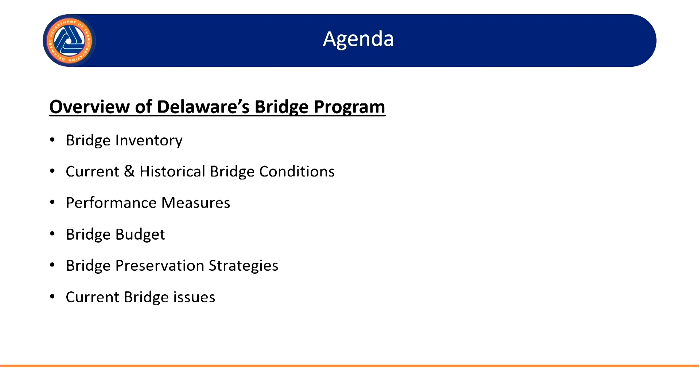So I'm going to talk a little bit about our bridge inventory, then our current and past bridge conditions, a bit about our performance measures, a quick slide or two on our bridge budget, our bridge preservation studies and strategies incorporated over the past 12 to 15 years, and then some current bridge issues we're having.

So that's not a typo. We only have 1,782 bridges. About 45% of those are NBI length, and the remainder are what we call state bridges, or non-NBI length. The deck areas are 8.4 million square feet for NBI bridges and just barely 500,000 square feet for our non-NBI bridges. We have 24 fracture critical bridges.

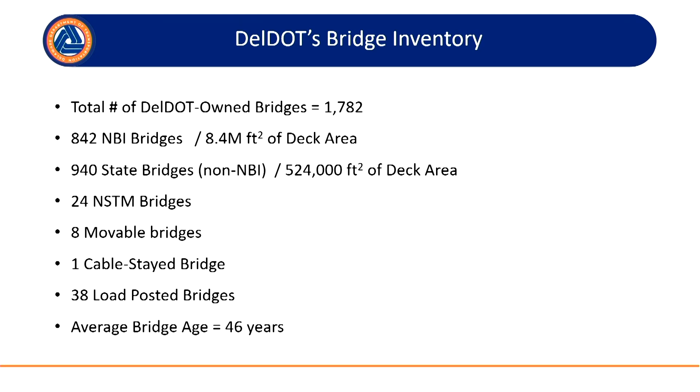We have 8 movable bridges, 1 cable-stayed bridge down at our Indian River Inlet, the beach area. If anybody can be here around the weekend, if you get a chance to get down there and see it, it's a real neat bridge. There's a nice restaurant there, and the beach itself is nice.

We have 38 load-posted bridges, and our average bridge age is 46 years. Just a quick snapshot, you can see we have a lot of culverts — more than half of our inventory is culverts, and of course a lot of that's our non-NBI bridges. We have almost 600 beam bridges, a little over 100 or so slab bridges, and then miscellaneous other bridges.

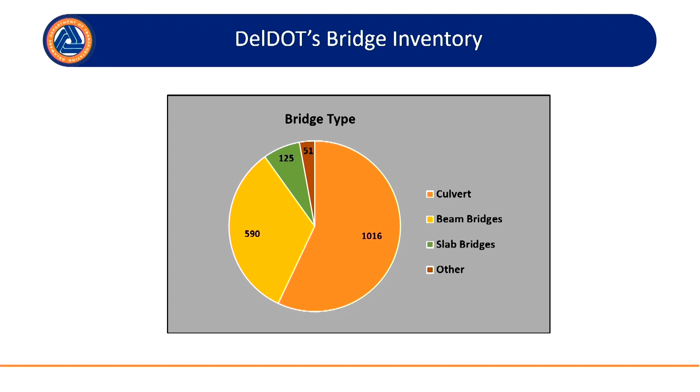So this is from our 2022 finalized data that we submitted to the feds. We're currently at just about 85% good for our bridges, and just about 1.5% in poor condition. This gives the breakdown between NBI versus state bridges.

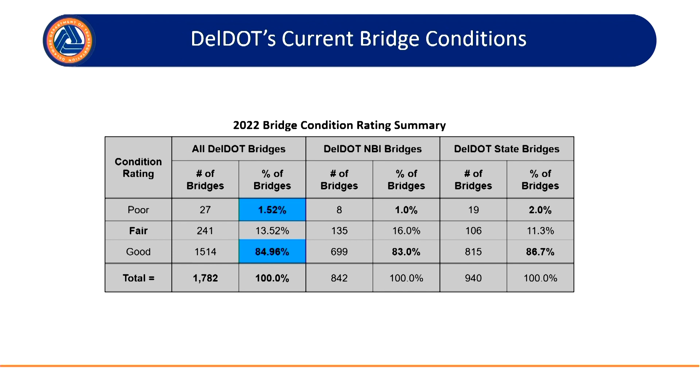Historically, for the past 12 years, as Jason mentioned, in 2011 we were at almost 73% good, and now we're at 85% good. You can see the trend going up. Likewise down at the bottom, the poor condition bridges were almost at 7.5% back in 2011, and now we're down to 1.5%.

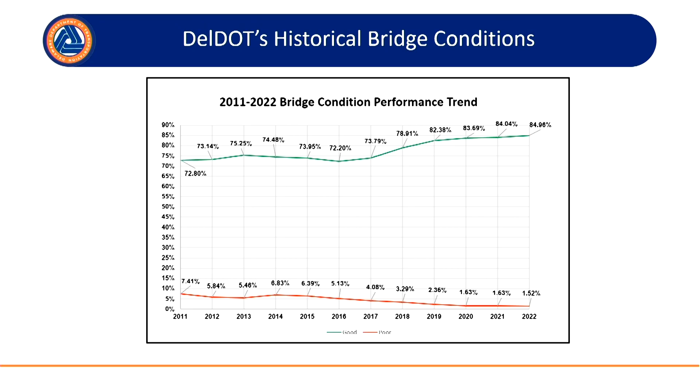A lot of reasons for this — we started throwing a lot more money at our bridges, a lot more work on the preservation and preventive maintenance side of things, and incorporated some different strategies to address our bridge conditions. As Jason also mentioned, combining bridge management with bridge design and creating a whole separate structures unit really helped out.

So, performance measures. Delaware is stubborn — when the feds changed the definition of fair condition back in 2016, I think it was, we still look at fair condition as NBI 5. So when I say good, that means NBI 6 through 9. Poor condition is obviously still the same. Our current performance goals for our bridges are to have more than 75% in good condition and less than 3% in poor condition.

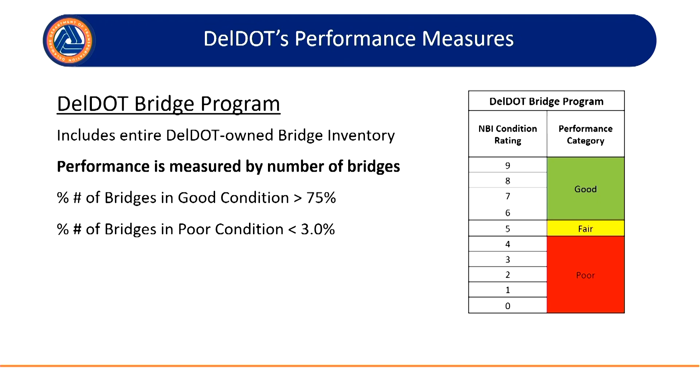So we're in an AASHTO BrM state for both our bridge inventory and our deterioration modeling forecasting program. I developed that probably back in 2019 through 2021 with the help of a couple others from our section.

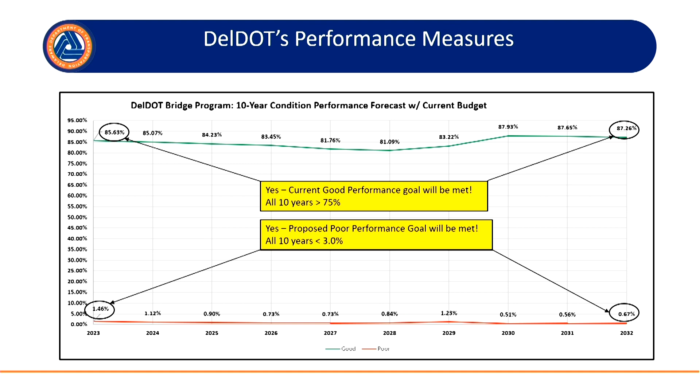This is a slide from our meeting with senior leadership earlier this year — it's the 10-year forecast for our bridges. You can see, about 85% there for 2023, and it looks like around 87% ten years out, so we're well above that 75% performance goal I showed earlier. Likewise for poor condition, by the end of the 10 years we should be around 0.5% in poor condition. So we're looking really good.

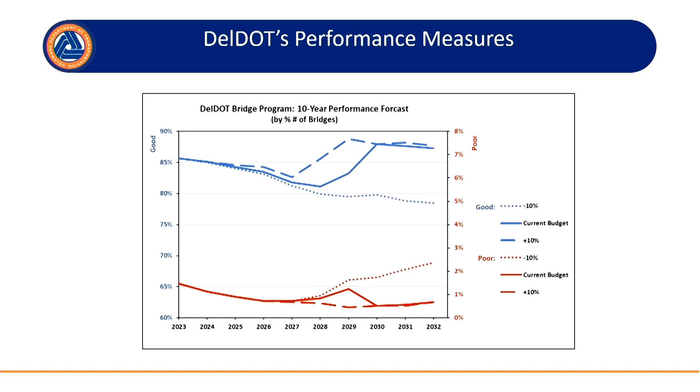So this is our bridge budget. This is strictly just bridge work, whether it's replacement, rehabs, or preventative maintenance. It doesn't include inspections or any other kind of structures. It's essentially on average $73 million per year for the next 10 years that we're planning on.

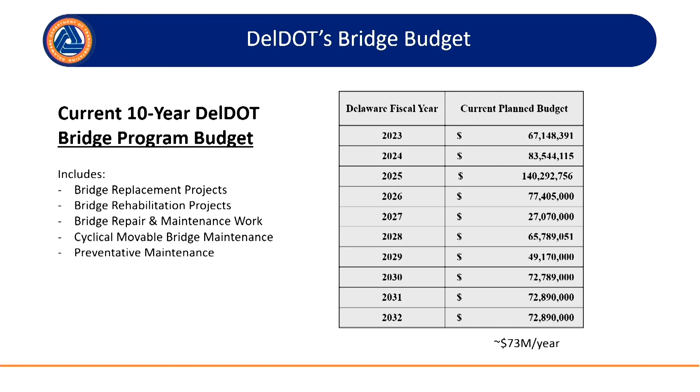During the orientation lunch earlier, I think it was Allison from Massachusetts who said that with the additional federal money and some state legislature approval money, they got like $3 billion that they're going to be spending in the next few years. I could work here for 30 years and we're never even going to spend $3 billion. So it shows you how small our program is.

Some preservation strategies - a lot of these are no different than what your state does. We have a concrete deck sealing program. We use penetrating sealers such as silane, but we'll also use methacrylate for actual hand sealing cracks in the deck. If there's a lot of cracks, we might flood seal the deck.

We started this in late 2018. To date, we have done about roughly 170 bridges. We have roughly 520 bridges with concrete decks. And our goal with this program is that we reseal the deck every 5 years.

We also have a bridge painting program for our steel bridges. While we're out there, we'll also paint concrete rails and concrete substructure units. We have 361 bridges that are steel supers. Assuming a 30 to 32 year paint life, that's roughly 10 to 12 bridges per year.

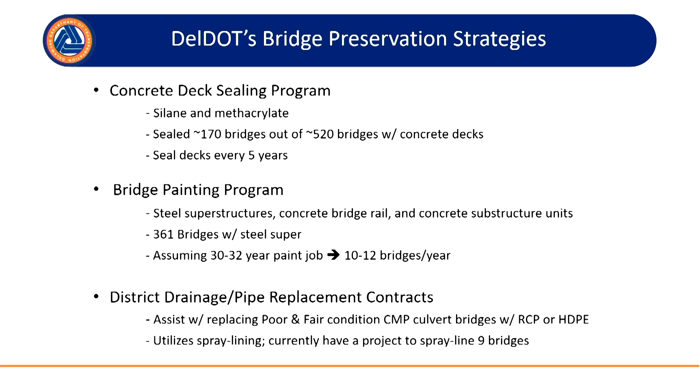We're not really doing that right now - we're probably more in the 7 to 10 range. So we're going to have to step it up over the next 5 to 10 years. We have our interstate coming due within the next 5 to 10 years, with a lot of bridges and a lot of steel beams.

We have 4 maintenance districts in Delaware, and each district has their own district open-end drainage contract. These originally just started out for replacing things like crossroad pipes, not really bridges. But about 2 years ago, we started using those to help replace some of our corrugated metal pipe bridges. Our Canal District is actually going to be using that open-end contract to either spray line or slip line 9 bridges that we have. So they've been helpful to attack our CMP bridge inventory.

We also have a pile jacketing program. These are typically used on steel monotube pile bridges that we have. We have very few bridges with H piles. We have 75 bridges that have monotube steel piles.

To date, we have addressed or pile jacketed 42 of those bridges. We currently have about 22 bridges in the works or planned for the next 2 to 3 years. At that point, we'll have about 85% of the bridges pile jacketed, and the rest we plan to have done within the next 10 years.

Typically it's steel piles - we have done some concrete piles that were showing significant deterioration. But most of our concrete pile bridges are pre-stressed piles and are still relatively new, only 30 to 35 years old, and they're just not showing the deterioration yet. But it's something that in the future we might have to start looking at pile jacketing as well.

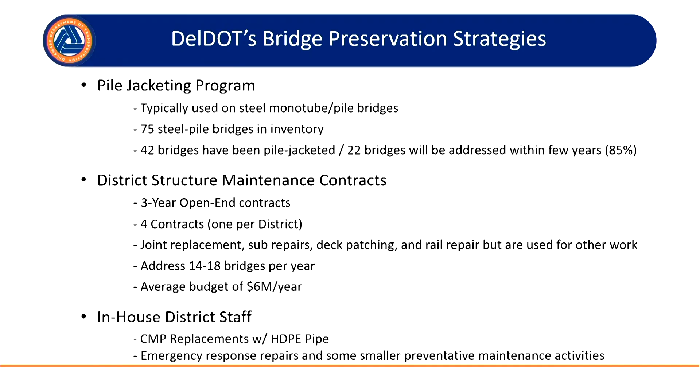Our districts also respond to emergency events, like a joint popping up in the road, or a big storm event. And they do some smaller preventative maintenance stuff like cleaning decks, cleaning out catch basins, drainage on decks, sweeping the bridge decks, resealing poor joints like along your wing walls or back wall, and some other things. But we're fairly limited.

For our interstate system, we have an open-end deck patching contract. This strictly addresses rideability, joints, deck patching needs, and approach slab issues. We spend about $800,000 on that a year. We're actually working on it — a lot of those joints on 495 and a northern portion of 95 are coming due.

There's a few bridges that need some overlays, and there's quite a bit of deck patching. So we're putting a standalone contract together to address that separately using federal funds, all at once in two different phases. We're going to do 95 north and then 495 next. A lot of these bridges are from the 60s and 70s era.

For our movable bridges, as I mentioned earlier, we have 8 movable bridges. We have 3-year open-end contracts to maintain those, do the cyclical routine maintenance, and assist when the bridges malfunction — unfortunately that happens from time to time — and also complete necessary mechanical and electrical repairs. That's roughly a little less than $5 million per year for all 8 bridges.

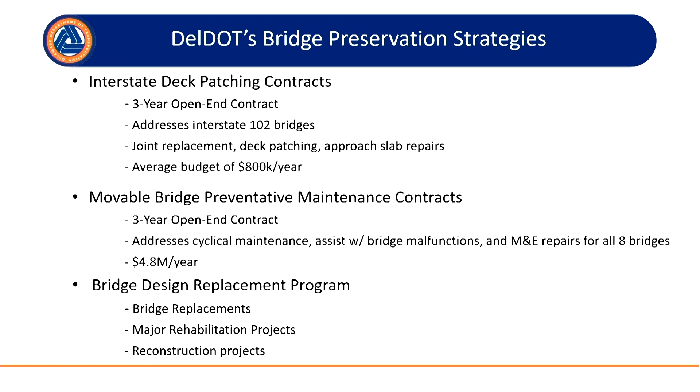Last, just the bridge design replacement program. I guess it's not just replacements, but this would be any major bridge replacement, rehabilitation, or reconstruction, such as a superstructure replacement or even a deck replacement.

So some current bridge issues that I want to discuss. What you see here is no different than any other state — typical deterioration, things we have to do to maintain our inventory. I'm not really going to talk about these.

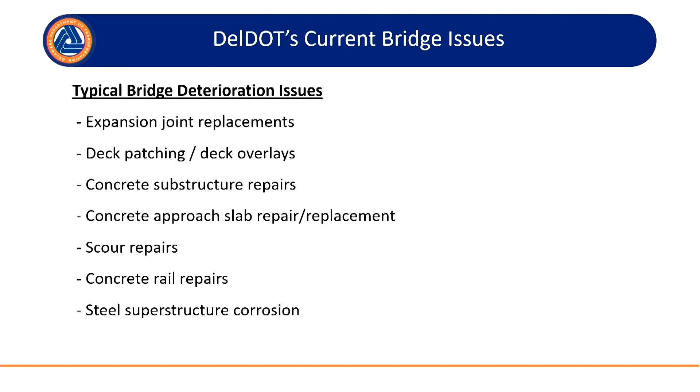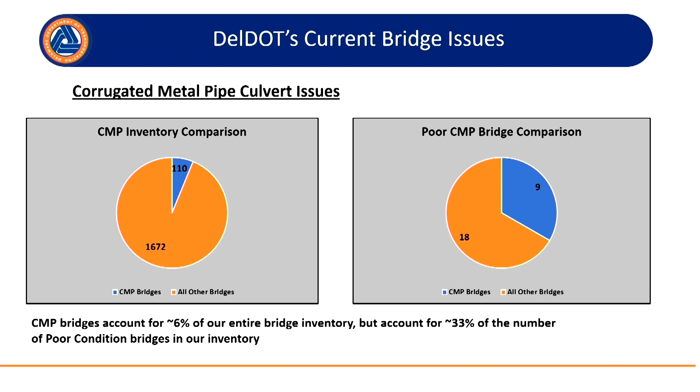The first one is our corrugated metal pipe inventory. It's something we've been dealing with since probably 2006. We're past the bubble and towards the tail end. This chart on the left shows the number of our corrugated metal pipe bridges, which is 110, and then all other bridges. So our corrugated metal pipe inventory accounts for 6% of our total inventory. But if you look at the chart on the right, we have 9 poor condition bridges that are CMP bridges — they account for 33% of our poor bridge inventory. So those 9 bridges are currently in the works to be replaced. Some of them were priority replaced this year, the rest will be replaced either later this year or first thing next year. Corrugated metal pipes have been a big thorn in our side for the past 15 plus years.

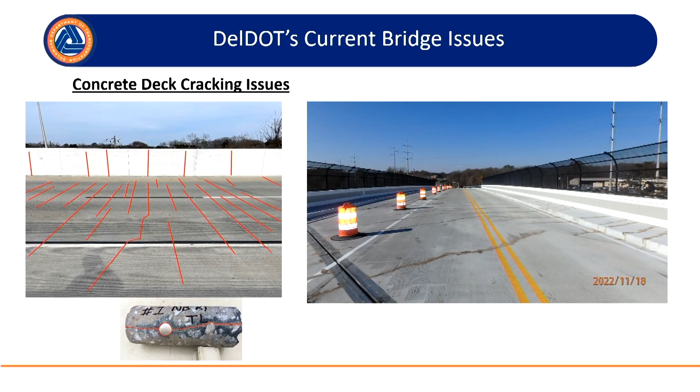Kevin Linda, who will be presenting next — he's not presenting on this topic, but he's actually the one from our department in charge of heading the research to look into this issue more and figure out what's going on. There's a number of factors, as you can imagine: your deck concrete mix, construction practices, temperature — everything. There's a lot that goes into this.

So the next issue is fill loss that we get behind a lot of our sheet pile bridges. It doesn't affect the bridge — no jeopardy for the condition or safety of the bridge itself. But a lot of times the steel sheeting either has lifting holes that were never filled, or when they drove the sheet piles, they split at some point. You get a little bit of scour, and it exposes that split. Or if it's timber, the timber rots. Basically, we get fill loss from behind that sheet pile, and the road behind it settles.

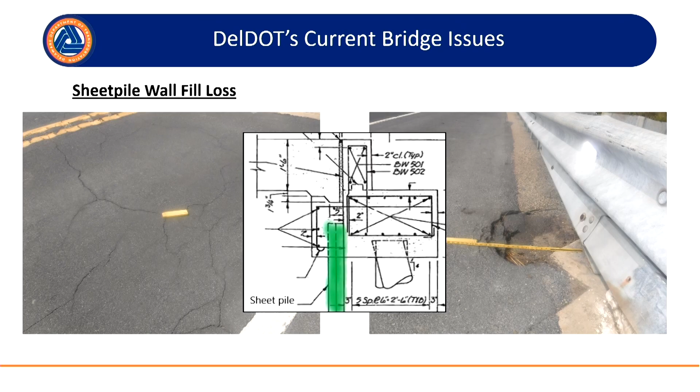We probably get maybe 2 of these a year that we find. We actually did a presentation on this. John Moore from our department, who will be presenting later today on paint, and Steve Richter did a presentation when we were in Burlington back in 2019 on this. But we still see it surface, and it's not a bridge issue necessarily in the sense that there's no safety concern or deterioration of the bridge, but it's something we've got to address.

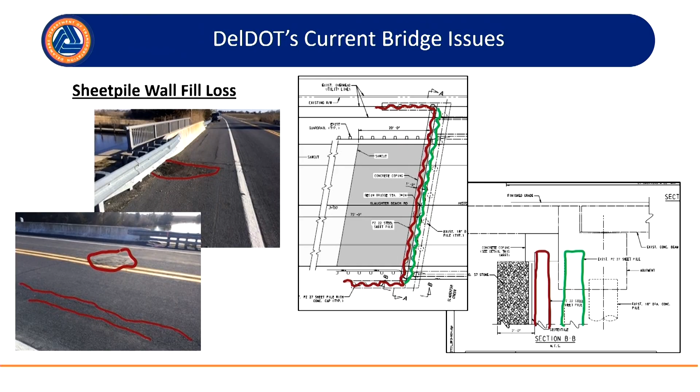So when we find this, typically what we do is drive sheeting behind the existing structure. In the center picture, you see the red marking - that's the new sheeting that we drive behind the existing one. And in the picture on the right, we'll actually put a cap on that concrete cap and tie it into the backside of the abutment. That way no more fill can be lost. Of course, we're only going to do this if we still have a lot of life left in the bridge. If we find this on a bridge that's really deteriorated or doesn't have that much life left, we might just look to replace it.

Typically, this happens along the coast, in areas where the bridges and roads are built on marsh, real fine silt sediment. It doesn't take much of a hole to start losing that material. And then you compound that with sea level rise, and a lot of these structures are now starting to overtop. You're getting water from both sides, and finally that silt finds a way out.

We started working with a consultant to come up with a fix and repair it. Then again, on December 28th of 2022, it was struck again before we repaired it. It was another excavator, a different company though. It did a little bit more damage, not a whole lot more, but definitely on the mechanical side it did a bit of additional damage.

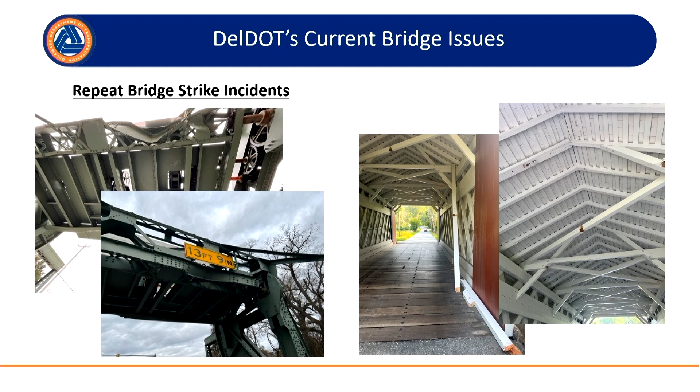Probably at least once a month, we would get a call to go look at the bridge because it got hit. A lot of times it's box trucks, U-Haul trailers. Check-in and check-out time during the college year is usually when we would get called. People coming from Pennsylvania or out of state with their U-Haul trucks, taking their kid to college, didn't know that this existed.

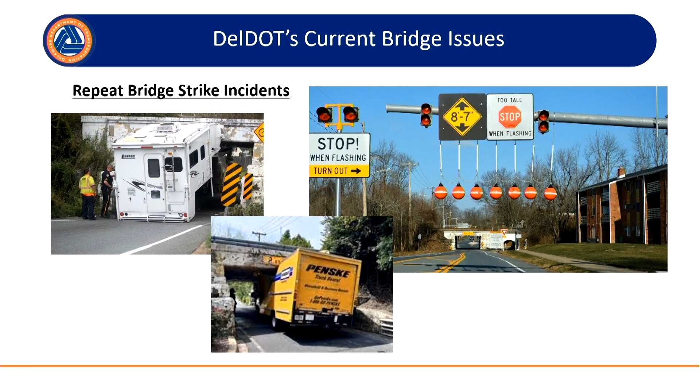It's hideous to look at. We're not going to be able to use these by that covered bridge because it's historical. It's an area where people are not going to like this. But they do work. There's a website associated with these where people comment and take pictures, and if you look it up, it's pretty funny.

When we first put these up, as I said, we're right next to the college. Kids were driving up there, they get on top of the vehicle, and then they're swinging off these balls. We thought about what we could do, put some grease on there or something.

We ended up not doing anything like that, but one modification that we did make is, initially it was just a steel chain with the ball on it, and the truck would hit it, and these things would just go everywhere, and then they'd come back down, get all tangled up. Sometimes they wrap around the mast arm.

So what we did is, you see the daisy chain going from one ball to the next. We did that so they kind of act all in unison. And then up in this area, we got PVC pipes, that way they can't flip over. The first couple months was pretty much a maintenance headache to go out here and try to untangle these things and get them out. But now it's working pretty smoothly.

So this is a solution maybe that if you guys haven't already incorporated for some of your bridges that get hit, something that you could possibly incorporate. And that's all I have.